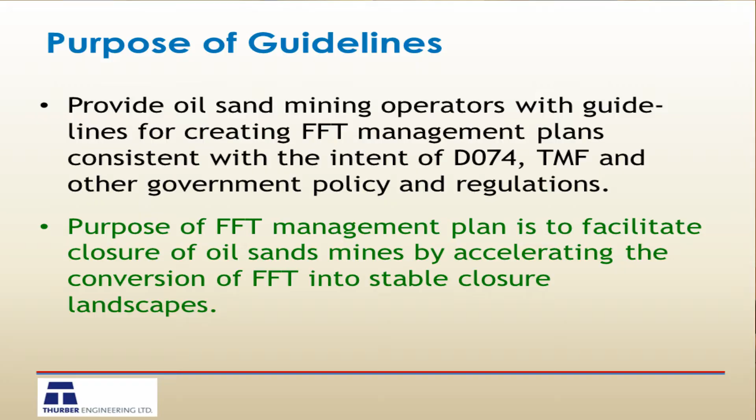Now, there's been a lot of work on that last item, starting before, but with the tailings roadmap, and then going through a couple more cycles in different documents that have come out from COSIA. And there's now, I think, a very good set of reclamation and closure objectives. They're included in this document. We don't have the time to go over them here today, but they are of interest. Just for context, various documents are available to the industry.

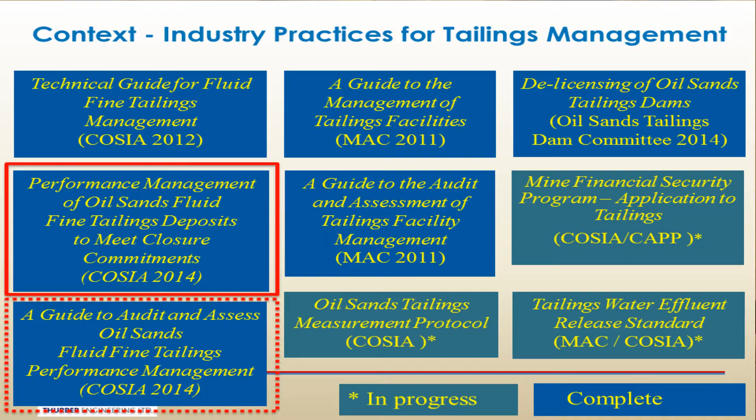The one highlighted in red here is the one we're talking about today. Those on the left-hand side of the screen are COSIA documents that have been produced to try and give some direction to industry. There's the technical guide for fluid fine tailings management. It talks about all the technical aspects. Then there's the management guide, and then there's also a guide to auditing and assessing oil sands fluid fine tailings performance. So the guys that put this document together really felt that it was important that there be an audit process.

And I'm sorry I forgot to thank my co-authors here. There's a group of 4 people that put this document together: Richard Dawson with Norwest, Brian Watts with Klohn Crippen Berger, Al Hyman, who we've heard from at the conference already, and myself. And I'll give some acknowledgments to other people that provided input later on.

So to me, this is kind of the most important part of this talk. And it's important not only in understanding the definitions, but also in the context of what is coming out in the tailings management framework. The authors spent probably 8 solid hours debating this one slide. It was a lot of hard slogging, and it finally ended up at something that was fairly straightforward. We're proposing that we recognize 2 different kinds of fluid fine tailings. We call them Condition 1 and Condition 2.

So Condition 1 are fluid fine tailings that are in their final position in the closure landscape. They've had everything done to them that's going to be done to them. They are on a trajectory to being reclaimed. All they need is time, as defined by the closure plan, as defined by commitments to the regulators.

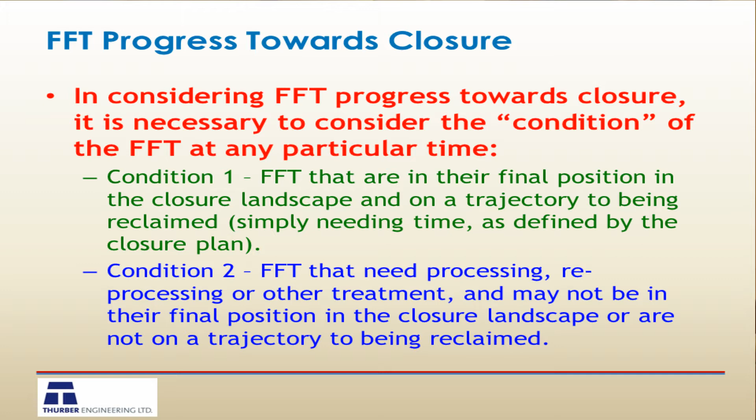Now, what are the implications of this? Well, with the first group, all we really need to do is monitor their behavior with time. We have a commitment to the regulator that they will behave in a certain way, and we'll monitor them to make sure that they do. And if they don't, we'll talk about what we're going to do in that case in a little while.

For the condition 2 material, we need to monitor and manage the volume of that material with time, and this is one of the concepts that's come into the tailings management framework, which I think is a really good one. The operator is going to need to commit to a certain volume profile with the regulator, and they're going to need to ensure that they stay within those regulatory commitments.

And if you've read the TMF, you will see that volume profile is allowed to grow for a while, and then it has to peak and decrease. And by the end of, or within a certain amount of time after the end of mining, that volume is supposed to be zero. So clearly we're not going to be able to meet that kind of volume profile unless we have active involvement in converting condition 2 fluid fine tailings into condition 1 fluid fine tailings.

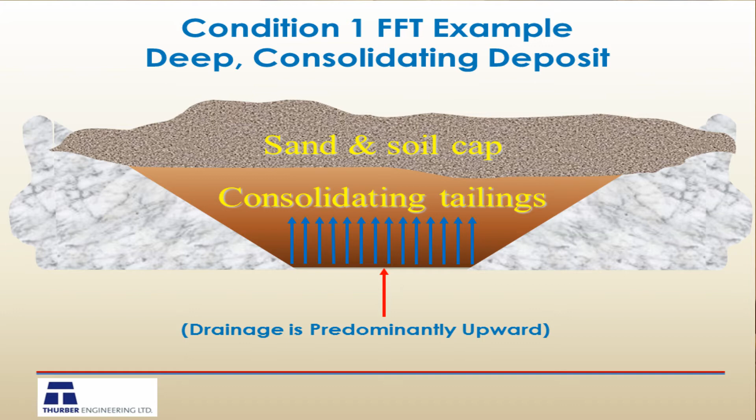So here's an example of what we're talking about by condition 1 fluid fine tailings. In this case, it happens to be some material that's in an in-pit situation. It's some kind of tailings. That might be TT, it might be centrifuged MFT, but it's some kind of tailings on which we've managed to get a cap which has some loading on it, which is consolidating, and essentially that's where it's going to be in the closure landscape, and we're just waiting for it to get through its consolidation process.

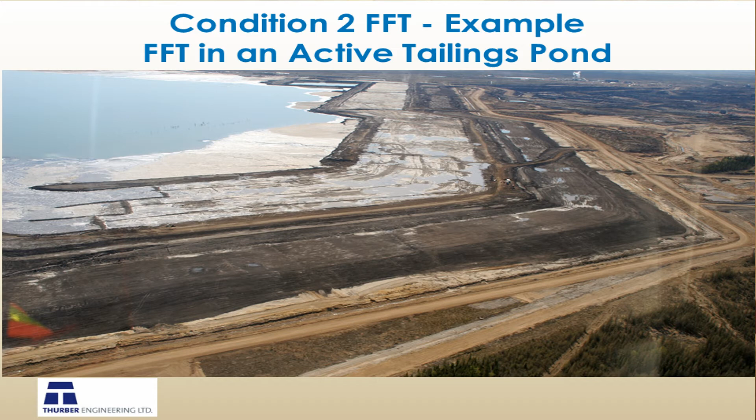An example of condition 2 fluid fine tailings are all the tailings that we have in our existing tailings ponds. We place them in cells, we place them on beaches, that material segregates. Some of the fines is captured, as has been discussed already, in the sand, and about half of it ends up in the pond. So that half of it that is captured in the sand is condition 1 fluid fine tailings, and the other half that ends up in the pond is condition 2 fluid fine tailings. I suppose I should correct myself. Once it's captured in the sand, it's not fluid anymore.

Okay, what's our tailings performance management process? Well, first of all, we've got all the normal planning things that go on in a mine. We have to characterize our ore body, develop a mine plan, develop a tailings plan, a water management plan, closure and reclamation plan. Hopefully, all these plans are well integrated. They talk to one another. There's nothing there that doesn't work in the overall planning process, and the plans transition seamlessly one into another. Now we know that's the perfect world, and it doesn't always work exactly like that, but that's the ideal that we're striving towards.

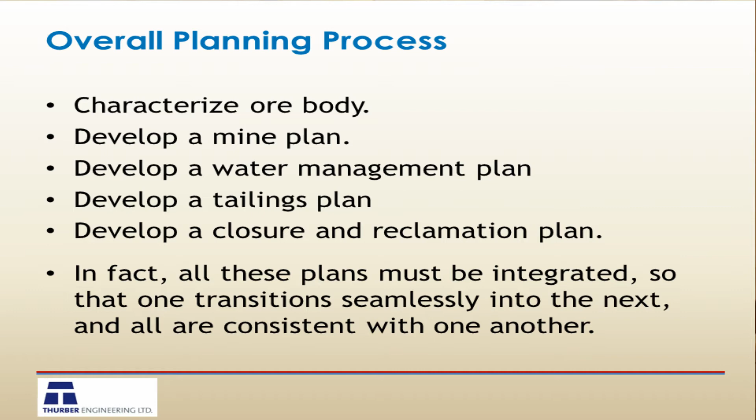So we prepare our site-wide tailings plan, and then we prepare a fluid fine tailings management plan that is going to get submitted to the regulator for approval. And it'll be whatever it is. It'll contain some components that we're going to talk about in a minute, and then we'll give it to the regulator, and they'll decide whether they're approving it or not. If they don't approve it, we'll go back through the cycle again and revise the plan. But if they do, which hopefully we get to that point sooner or later, then there's two ways of going.

For material that we know is going to end up as a condition 1 fluid fine tailings, we're going to deposit those in certain areas, and then we're going to monitor and report on their condition. And as long as they continue to behave the way they're supposed to, we just keep on going. Eventually, we get to a progressive reclamation state, and at some point we're ready for final reclamation and closure. If they don't behave properly, we come back through this part of the loop and apply certain mitigating measures, which have already been defined. We go back, talk to the regulator again, and go back through the cycle.

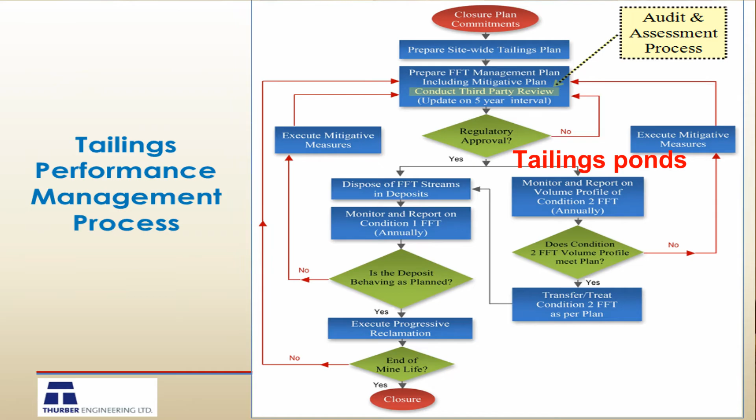For other materials, such as those going in tailings ponds, we know we're not producing condition 1 tailings, we're producing condition 2. What we're doing is monitoring the volume profile of that. As long as our volume profile stays within our commitments, then everybody's happy, I guess. And at some point, we need to take that material and treat it in some way and deposit it elsewhere so that we turn it into condition 1 fluid fine tailings.

So the idea is that we're trying to get to a condition where everything becomes condition 1 fluid fine tailings and ends up on a trajectory to a closure plan. What are the elements of our plan? We have some general description of the ore body, the tailings streams, the tailings deposits, where we're going to put material. The guts of it is that we have to say where we are going to put condition 1 fluid fine tailings and how it is going to perform. And we need to say the same about the condition 2, where are we going to put it and what sort of volume profile will we have.

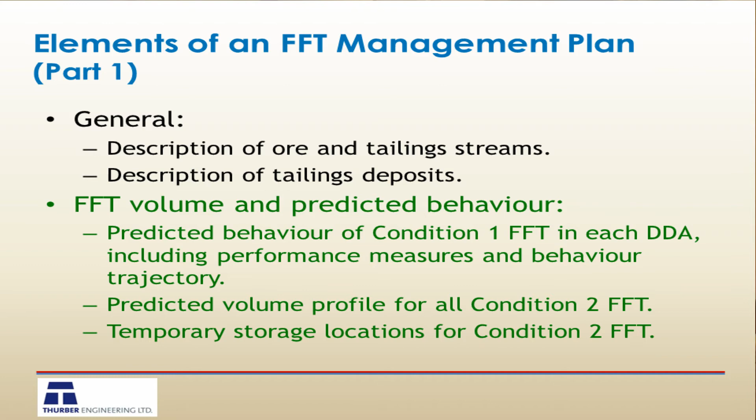For the condition 1 material, there will be a need to measure the behavior of that material. This chart here gives you an idea of some of the primary performance measurements for each deposit type. And we don't really have time to go through all these deposit types. I think Al Hyman talked about them the other day, but they're all the ones that are under use now. We've included at the end a category down here of deep, low SFR deposits, not because we want them, but because we have some of them. And maybe at some time in the future we'll be able to produce those kind of deposits as a condition 1 rather than condition 2.

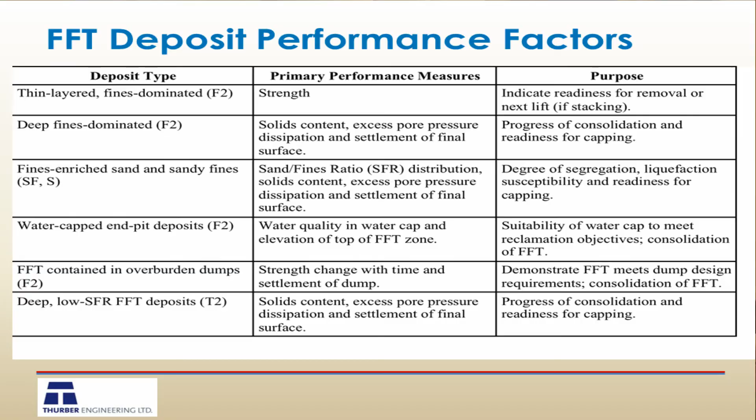Okay, so the idea is if we did nothing with our fluid fine tailings, we would follow a profile like this. We would just keep accumulating condition 2 fluid fine tailings, which has happened to a large extent in the past. What we're attempting to do is at some early point to start treating that material so that we start producing condition 1 fluid fine tailings, which also transitions into solid materials, and then this remaining profile of condition 2 fluid fine tailings is the one that we make the commitment to the regulator, and which we meet. And you notice that goes to 0 about 5 years after the end of mining.

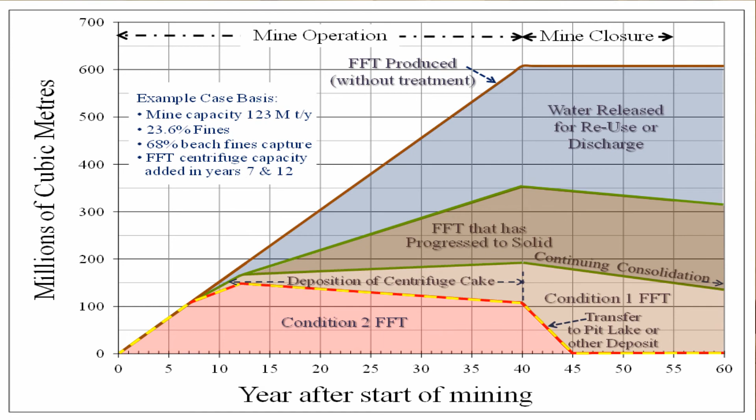Other important aspects of the management plan: we need to report on the behavior and then compare behavior to what was predicted, which is what we mean by performance. We make a distinction between those two words. We measure in conformance with, hopefully, some protocol that gets put out. There is a kind of a draft out there which hasn't been finalized or published yet. We report to the regulator on a regular basis, maybe every 5 years if everything's going fine. If not, more frequently. And then, as I mentioned before, we have an independent performance assessment, so that the government and the management of the company can be assured that what's being put forward by the technical people is in fact accurate. And there's guidelines in both the MAC and from COSIA on this independent performance assessment.

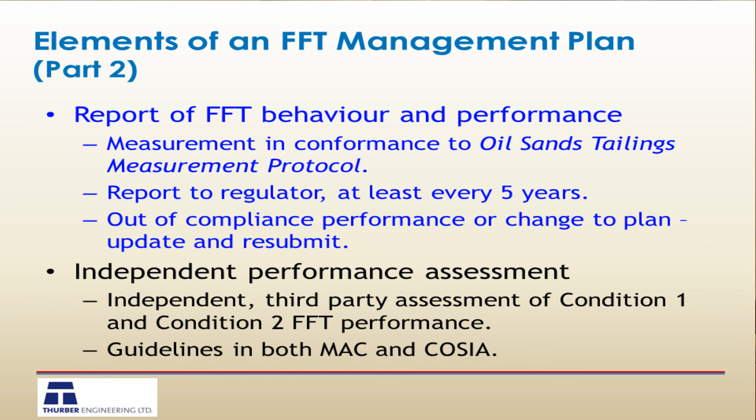Our stewardship is whether or not we're in compliance with our plan. So is the condition 2 fluid fine tailings within the profile that we've committed to the regulator, and is the condition 1 fluid fine tailings actually behaving within the range of behavior that we said it would, or better? And obviously we need to look at both absolute value and trends. So here's an example of something that might come up on somebody's plan. This is in regards to condition 2 volume profile. So the upper red line is the upper end of a range of predicted behavior for the volume profile. And the brown line with the yellow dots is the actual. So at some point, even though we're still in compliance, we need to recognize that we have a trend that may take us out of compliance, and we need to do something about it so that we stay within compliance with the commitments made to the regulator.

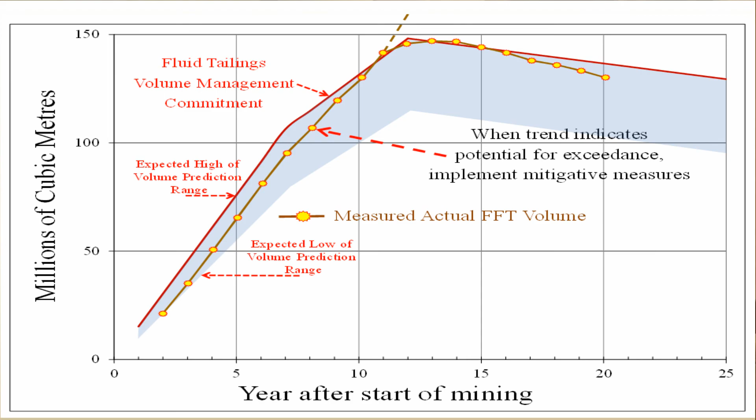So this is an adaptive management process, and we need to use it any time when we don't have a perfect ability to predict the future, which is almost all the time. Adaptive management says we have contingency plans to deal with foreseeable ways in which we might not perform the way we expect to. Those contingency plans must be practical, we must be able to implement them within the needed time frame. And the contingency plans must be implemented in a way to help us stay within compliance. So that's all I'm going to say about the document right now. There's quite a bit more information and detail that we haven't had time to cover here.

I will acknowledge people who've been both technical and non-technical reviewers for us. This is a list of our technical reviewers. These guys had the job of listening patiently to what our 4-person team had put together and critiquing that for sensibility more than anything. We also had a couple of regulatory reviewers, Jim DeLay and Wayne Clifton. Jim DeLay, I got to say, is the most polite person I've ever met. And it was essential that he be the person he is, to have the background that he had. His and Wayne Clifton's insights on the regulatory aspects of what we were doing were really important. So thank you to those people.